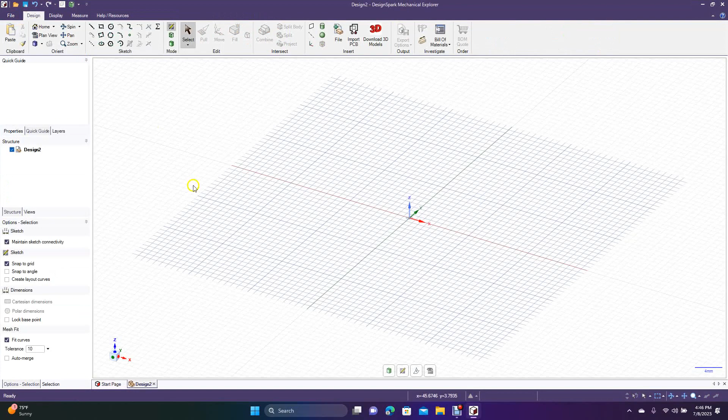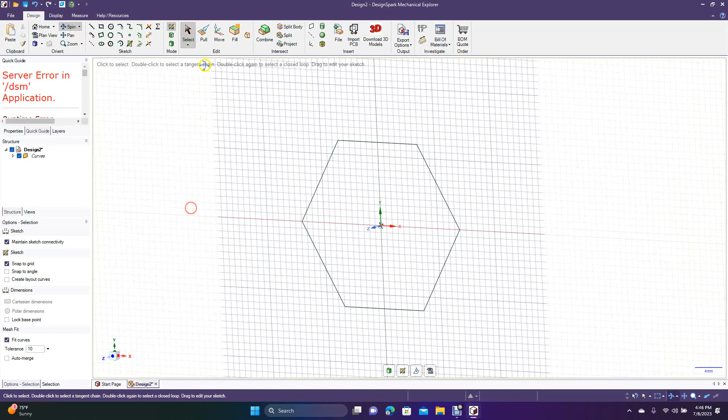We're going to go ahead and open up Design Spark, create a new design, and change it to the plan view by clicking that eye icon. Now we're going to come over here to the polygon, and we're going to do a 6-sided polygon, 24 millimeters. Go ahead and spin this, and then we're going to pull this from both sides.

So check both sides and just do 12. Is 12 what I wanted to do? Yeah, 12. I'm going to do 12 there.

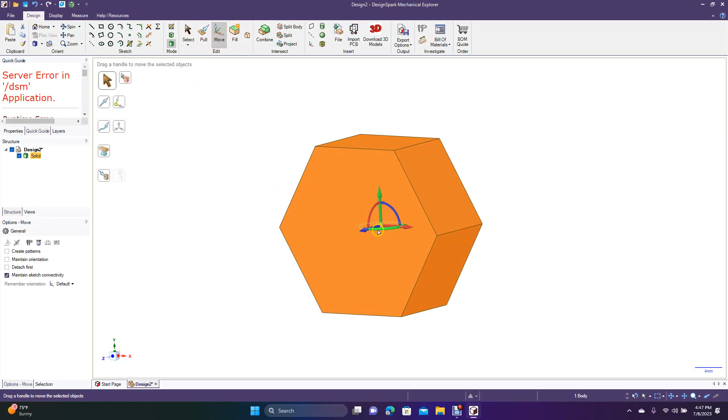Now we're going to go ahead and select that solid, and then we're going to go to move. Actually, we don't have to hold down control—we already did a copy and paste, and we're going to spin that. Actually, undo. Let's hold down the control key. I'm going to turn this one 90. Enter.

Then we're going to go back up here and grab this one, hold down the control key, and now we're going to spin this 45. So just go ahead and move it and then put 45 in there.

And then we're going to get that one right there in the middle. We're going to hold down the control key and move it the other way. Actually, hold on a second, let me go ahead and spin this.

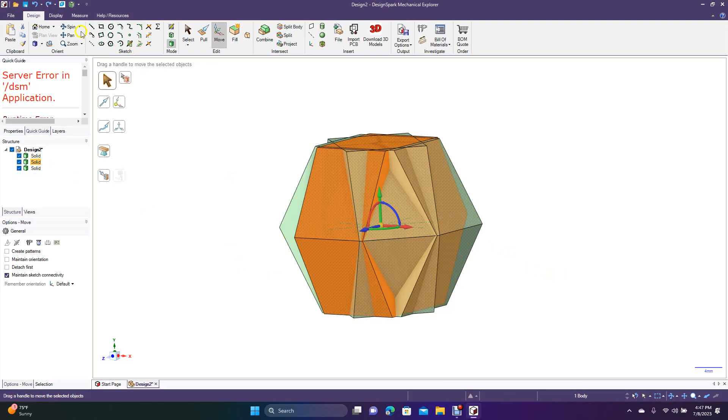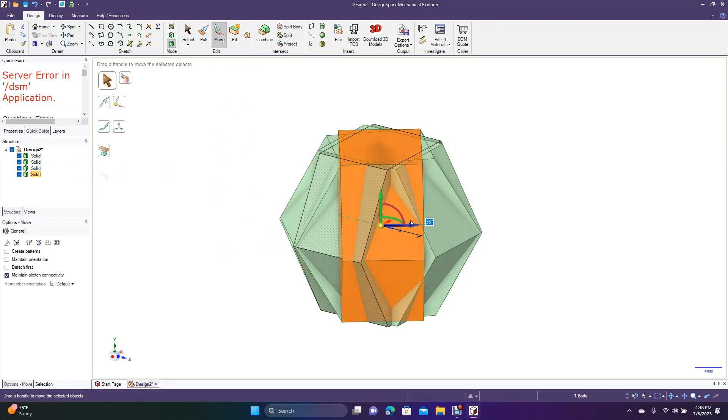Let's go this way. Go ahead and get that one. And then we're going to go to move, hold down control, grab that green, and then rotate that 45. And then we're going to spin this.

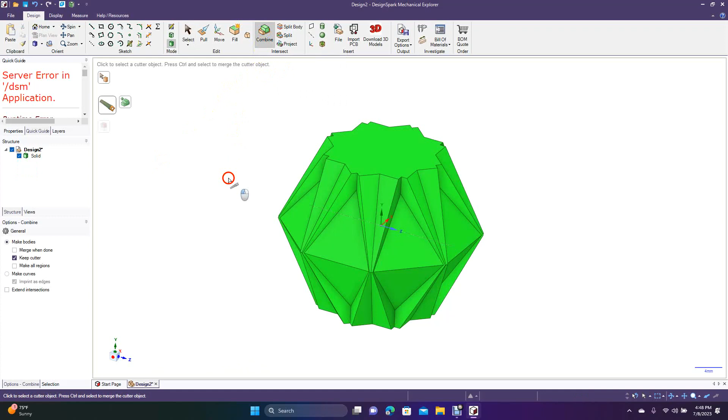So this is going to be our shape. Now what we need to do, since we've created so much geometry, is select the top one, hold down the shift key, select all of them, and then come over here to combine. Give it a second. And now we're going to go spin this.

We'll do a shell in here. Let's do 0.5 millimeters since this is small. All right, so this is going to be our vase.

And then what we can do is go ahead and go to pull. We're going to select all of these down here, and then come over here to chamfer, and we're going to add a little chamfer to the bottom of that.

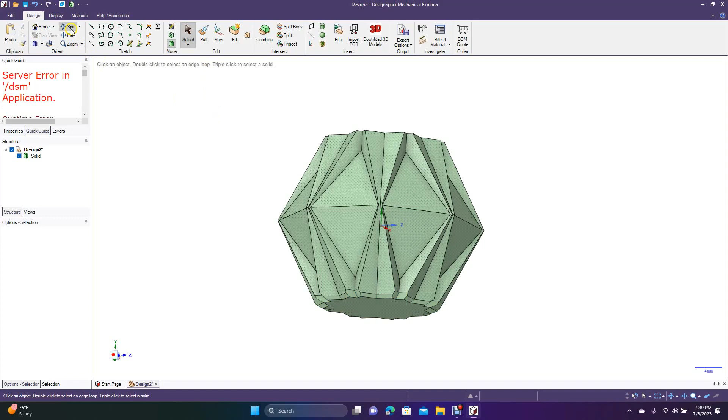All right, this is going to be our vase. An interesting little three-dimensional 6-sided polygon shape that we created with a series of extruded polygons, and then we shelled the top 0.5, and added a chamfer to the bottom.

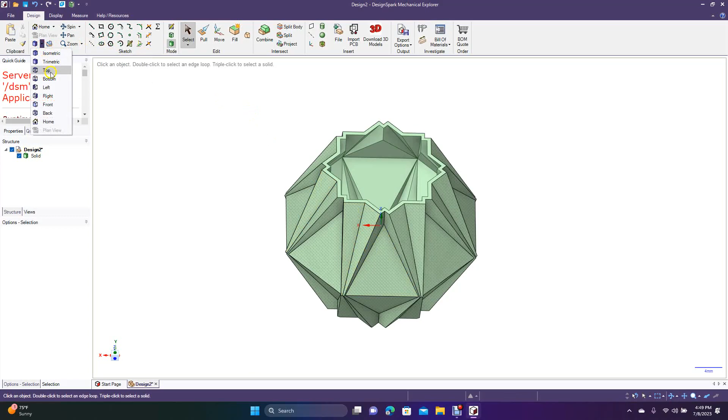All right, that's going to end the tutorial today. We'll go ahead and view this in the trimetric. Actually, it's better the other way, as you can see the opening. Go ahead and spin this. Okay, this would be good.

This is a nice little vase. You could print something like this out and drill some holes in the bottom, or you could just put the holes in the bottom now, so you have a vase you can grow something in. But I'm going to use this more as a vase to put flowers in, or whatever, so you don't have to worry about the water leaking out.